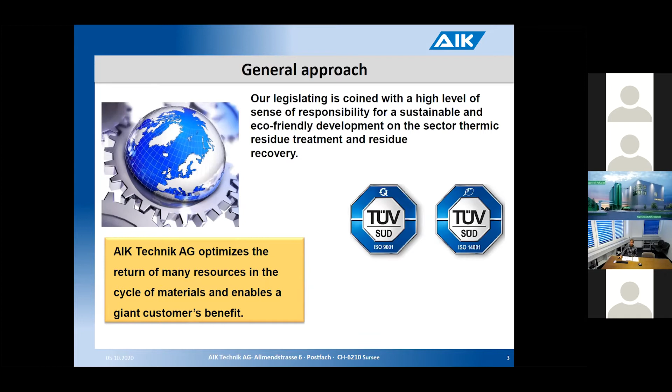We also have another market segment with pit and quarry, and we have big experience with fly ash treatment. One of the most important points is that our legislation is coined with a high level of sense of responsibility for a sustainable and eco-friendly development of the sector, thermic residue treatment and residue recovery. So we try to optimize the return of many resources in the cycle of materials, which also enables a customer benefit. We think also of the next generation, so we try to develop technology that could reduce the impact in the future for our children.

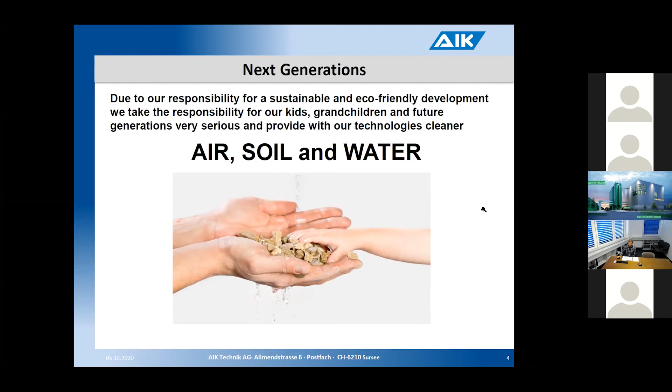Where are we working? We are working in waste-to-energy plants. We work in the pit and quarry industry, where we try to decontaminate soil and bring these materials back to the circular economy. We have after sales and services, and then we have research and development. Research and development is very important because each plant, each customer of ours has different concentrations of materials, and for us it's important to help the customer optimize his process. And so we can also develop new technology in our laboratory and get a better approach to the process.

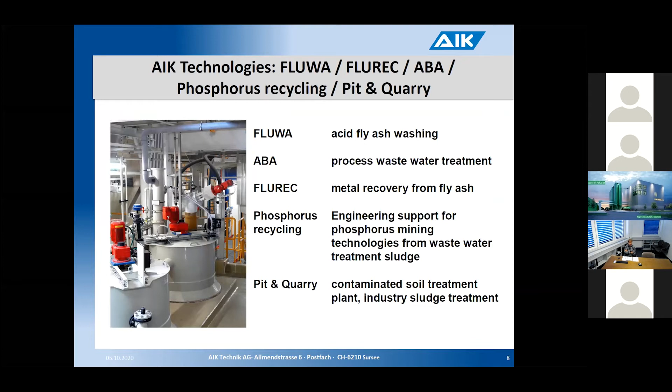What is the approach? One important point is that Switzerland has no hazardous waste disposal, so the fly ash without treatment would go abroad. But that is not the idea of our legislation. So we would like to return the liquid phase to nature. We want to dispose of the washed ash in Switzerland, and we also want to return the zinc to the cycle via a metallurgical plant. These 3 points are achieved by acid fly ash washing, which is the state of the art in Swiss incineration plants. From the 1st of January 2026, all fly ash in Switzerland must be treated by acid fly ash washing.

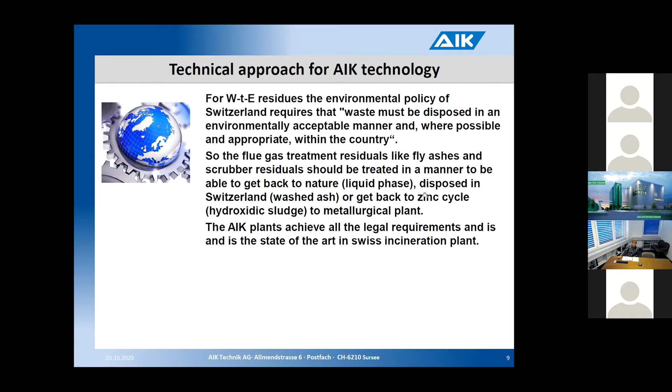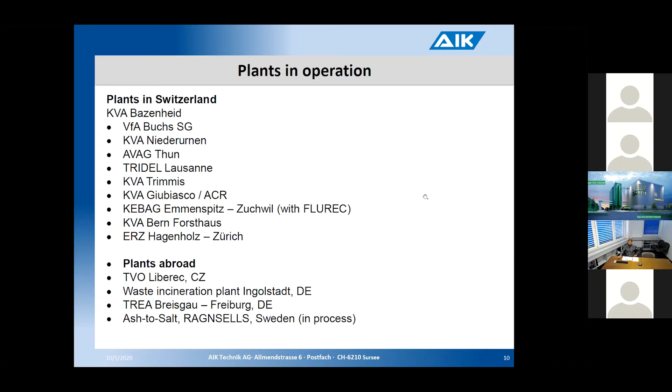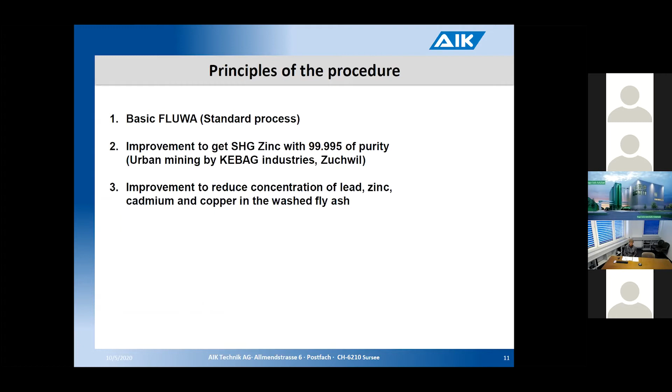I show you 3 points. The basic FLUWA, which is the standard process implemented in Switzerland. There is an improvement to get high grade zinc with almost 100% purity. That's urban mining by Kebag Industries in Zuchwil. And then the newest development in the legislation is to reduce the concentration of lead, zinc, cadmium, and copper in the washed fly ash.

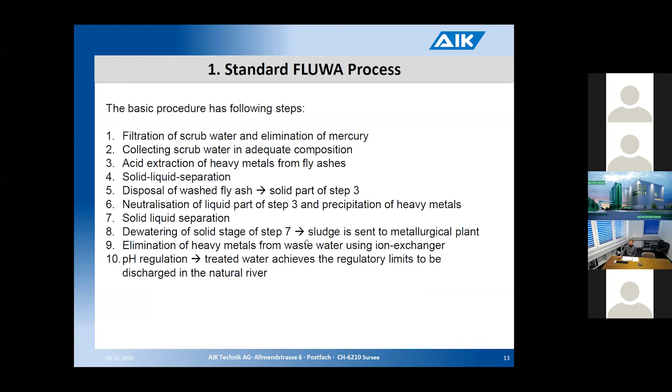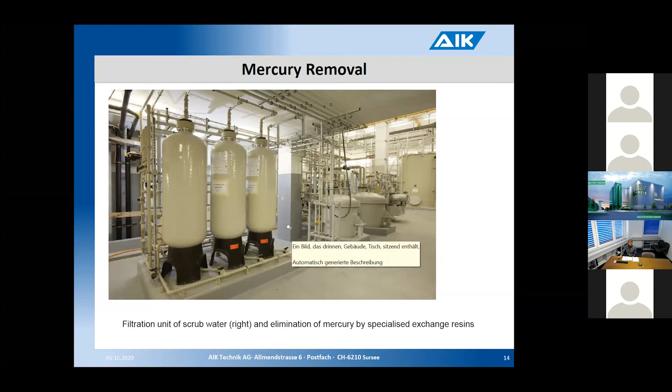You see here a standard FLUWA process. I will show you in pictures which are the different steps. First of all, it's necessary to have a mercury removal, because even if mercury has been forbidden for many years, you will find mercury in the scrubs. So we make a filtration and then an elimination of mercury with specialized exchange resins.

Then we take the fly ash from the silos and we mix it with the acid scrub, which has about 5% of HCl. We mix it and stir it. It's about 1 hour of mean time. And in this step, we extract the heavy metals as much as possible from the fly ash.

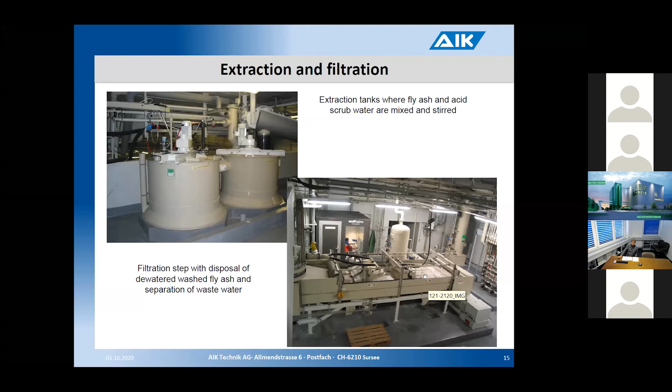The next step is a filtration, where we work with a vacuum belt, and we also wash the fly ash on the vacuum belt, which is disposed at the end to the Swiss disposal. You will have a filtrate from this filtration, and then you will go through wastewater treatment.

The wastewater treatment is a classic neutralization, precipitation, and homogenization of the wastewater that we handle with a total filtration by candle filters. Candle filters produce a very clean water. Clean means that the solid content is very low, and then we can reduce the heavy metal contents to meet the limits for going back to the river.

The second part of the filtration is a sludge which is very rich in zinc. We have an automated dewatering system, and the sludge is then sent abroad to produce zinc. We have no metallurgical plant in Switzerland. So this is a classic FLUWA process which is implemented in all the FLUWA of Switzerland.

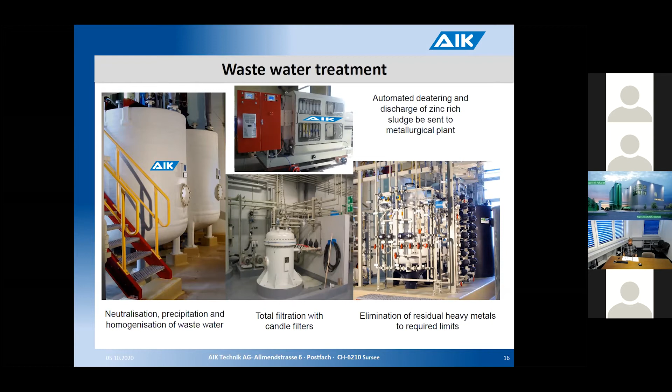First step is cementation, where you dose pure zinc to reduce cadmium, lead, and copper to metallic state. So you have a granulate that you can separate from the filtrate. The filtrate goes further. The filtration is a primary filtration with candle filters, and then a secondary final filtration. And you dispose these granulates of these three metals into big bags and they go back to recycling industries.

The next steps are solvent extraction and electrolysis. During the solvent extraction, you transfer the zinc, which you will find in the filtrate, to an acid solution. You separate it from the other heavy metals, and then you use a fully automated electrolysis to produce pure zinc.

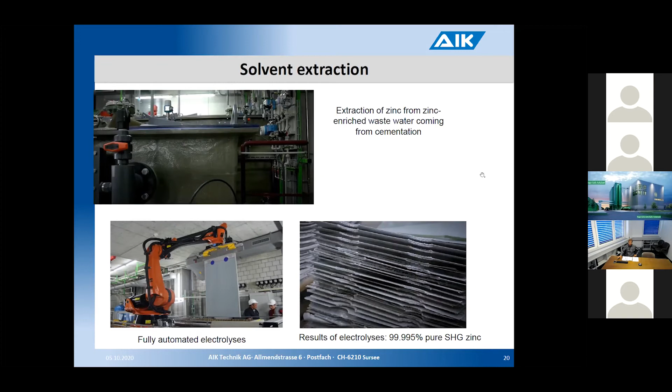The installation in Zug will produce about 300 to 400 kilograms of pure zinc each day. Switzerland is planning a big installation to produce zinc from all the fly ash produced in Switzerland. Then the wastewater goes to the wastewater treatment plant.

Now we have a very new development in the legislation where the agency would like to have some defined extraction rates for lead, zinc, cadmium, and copper. Today, the FLUWA leaches these elements as well as possible. Next, we have to achieve a rate. So the challenge is how we get the rate that is written in the laws.

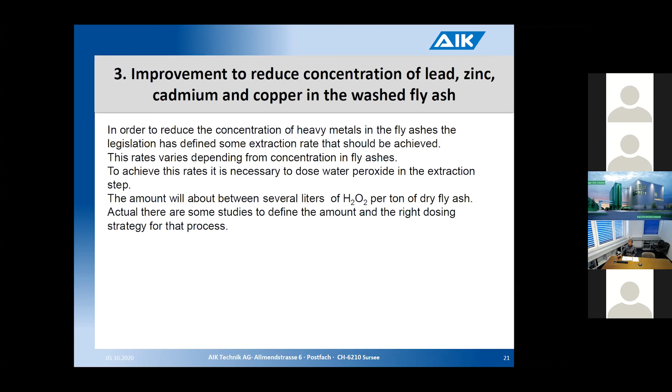For this, hydrogen peroxide is used and is dosed during the extraction steps. Studies are going on to find out which is the right dosing and where to dose it, because all the chemical processes going on during extraction are quite complex.

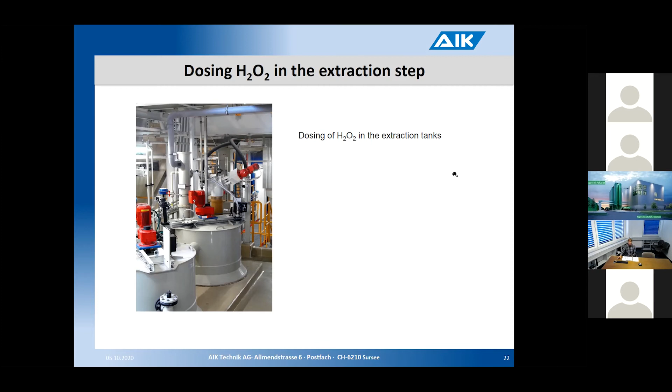What are the technical challenges? For the basic FLUWA, one of the technical challenges we have is to have a constant composition of the fly ash, because each FLUWA receives 2 or 3 or 4 different fly ashes, and it is very important to have a quite regular concentration. So the dosing is very important for that, and also the scrub contents are immensely important.

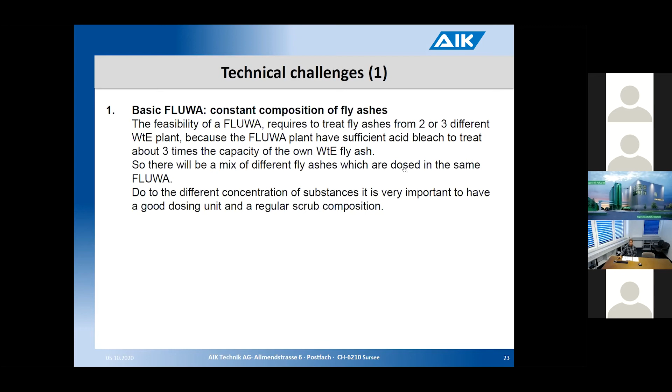The law regulation about extraction rates is also a technical challenge, because all the FLUWA are now working and they have to introduce this hydrogen peroxide dosing, and as a company, we support the operators and guide them towards the new requirements and implement the changes needed in the plants.

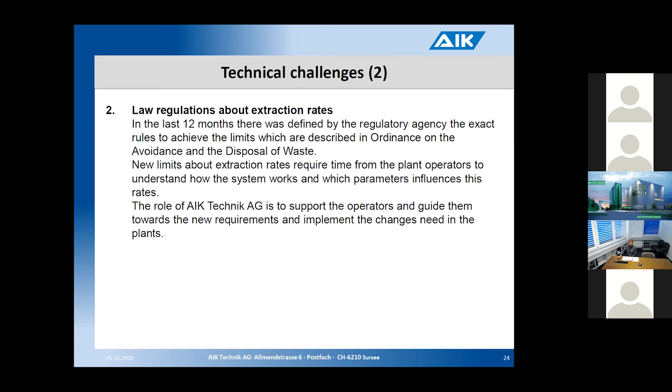So we support them and we work with other people who are working on the main problem. And further, with the circular economy, with the Flurec technology we try to contribute to the circular economy in urban mining, which is today very important. And to develop this technology it is also important that the public institutions promote the research and implementation of this technology, and that they also take some technical risks to help fit it into the working technology we have.

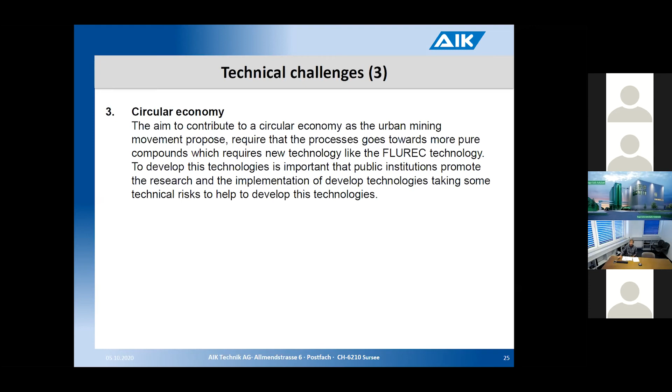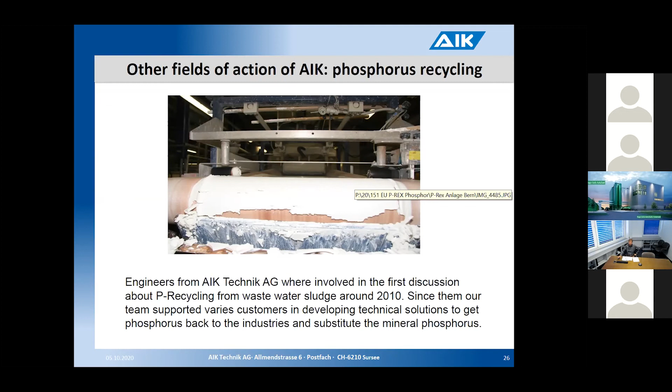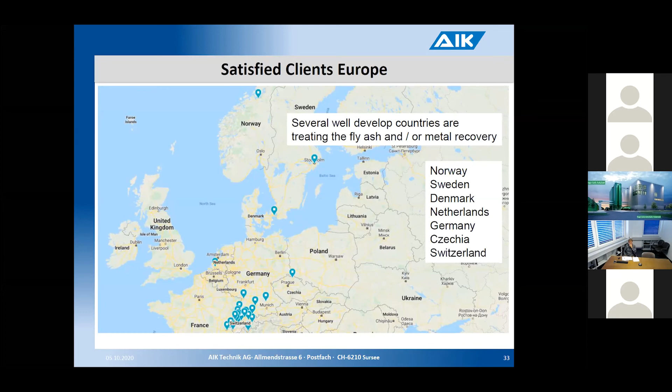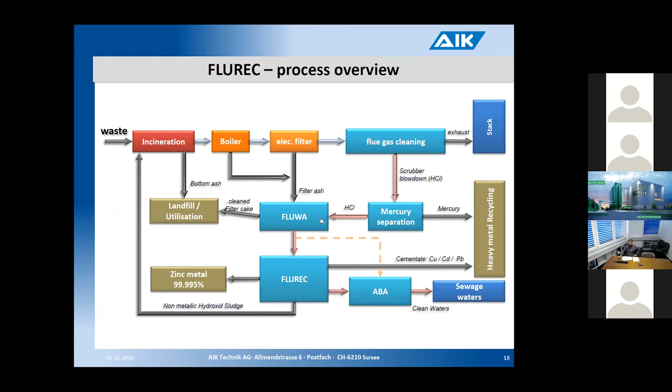I have to ask, though, the diagram shows recirculation of the treated fly ash to the incinerator. Is it correct? I think it was earlier, maybe when you showed the whole incinerator figure. Yes, there are some technologies that could bring the ash back to the incinerator to get it out with the bottom ash. But the normal application is that the bottom ash and the fly ash are disposed in the dump together in a special sector of the waste disposal site. So there is no major impact on the performance of the incinerator when you have a little bit of recycling? No, there is no impact. Okay.

And so there is a question around exactly where the zinc recycling is happening. Is it done by FLUWA, or is the final step done abroad? So the Flurec installation is installed beside the FLUWA installation, because it's not such a big installation, but you can also work abroad if you have a filtrate. But the installation in Zuchwil is beside the FLUWA.